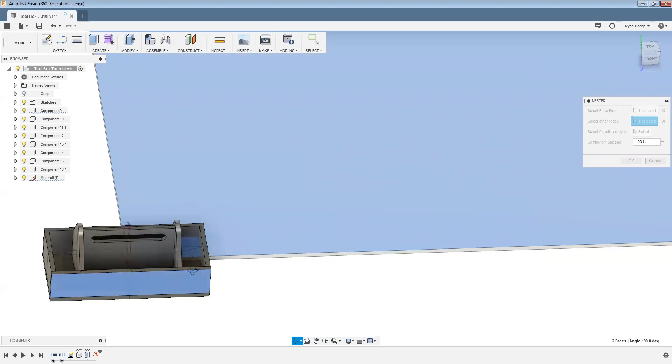Now the first component to input is the material to be cut, or the face of the material to be cut. And then we'll select the faces of the components to be nested. So I've noticed that it will nest the components in the order they're selected. And for what we're doing, a simple two-dimensional cut, there's no additional pockets or slots. So the face that we select is not very crucial.

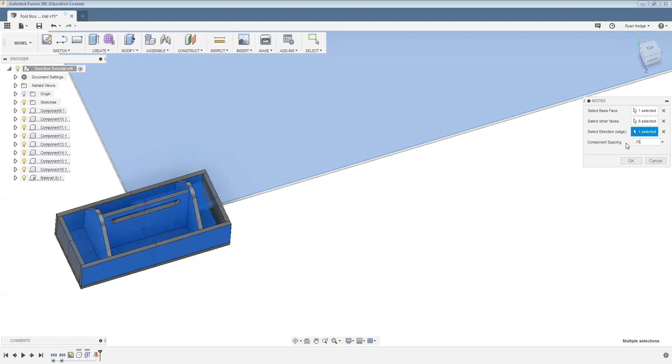Next, we need to input the direction of nest. So we'll take this long edge. And we'll be using a 1/4-inch router bit to cut out these parts. So I'll give it a spacing of 0.35, and that should be sufficient. So the Nester app flattens all of our components into the material. So if we look at it from the side, the components are embedded into the material.

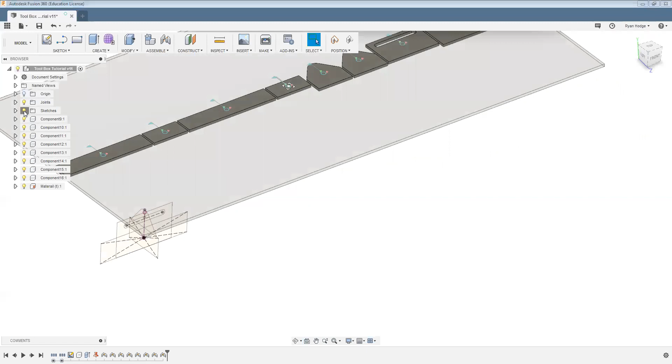Now we no longer need sketches, so we can turn that off. I notice a slight flaw with the Nester app. If I go and capture the position now, it brings everything to the center of the material. I can Control Z to bring that back. And I need to make a move function to capture all of these parts.

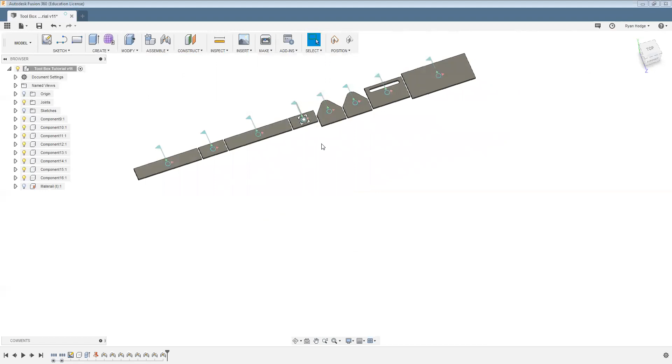So I'm going to use M on the keyboard. I'll select all the parts. I'm going to use a point-to-point move. I'm going to move it from this upper corner to the upper corner of the material.

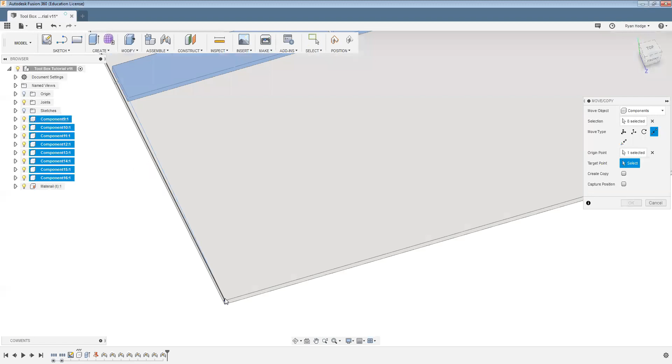Now I also need to move my components a little bit away from the edge. So I'll come back to the move type and select free move and drag it in this direction. And I'm going to come off the edge 1/4 of an inch. And I'll do the same for this next edge, 1/4 of an inch.

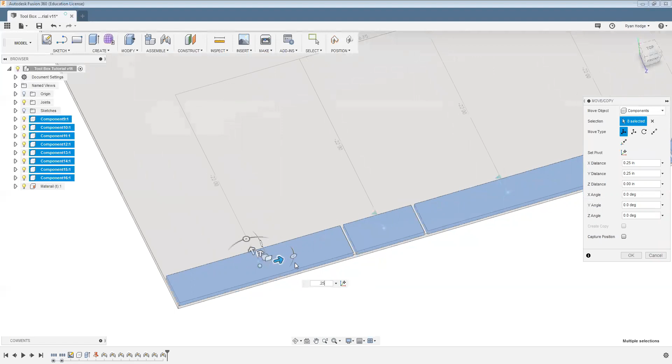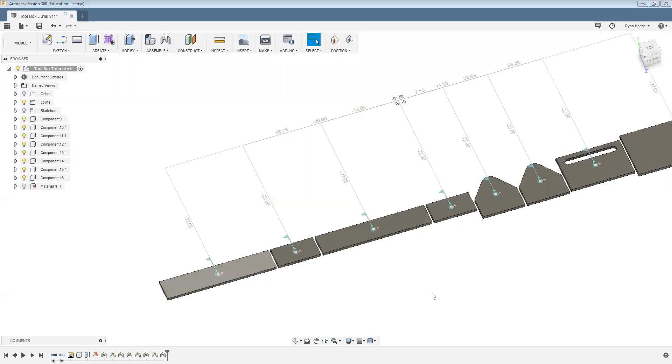Okay. So now I'm going to continue moving these parts to where I think they best fit in the scheme of this cut. So I'm going to try and contain everything within this section here. I no longer really need to see the material because I know the spacing I'm going to use. So I'll select M on the keyboard again for move. I'll use this point-to-point move again. So I'll move it from that corner to that corner.

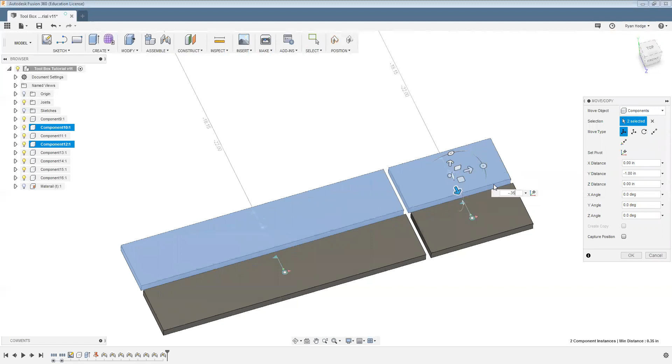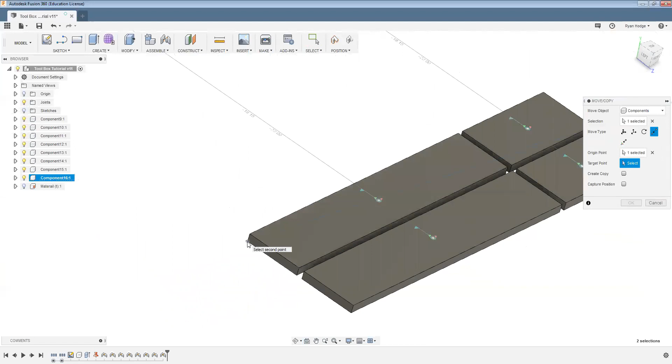I go back to the free move, and I want to move it away minus 0.35. And I'm just sort of moving it where I think the parts will fit the best. It is ideal to double check the material that you're going to be cutting to make sure that it's going to fit within this range that you're nesting the parts into.

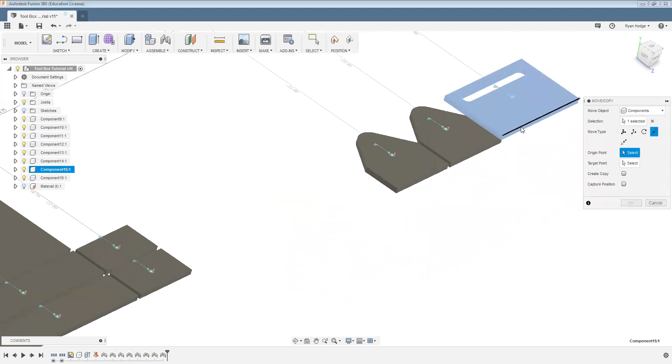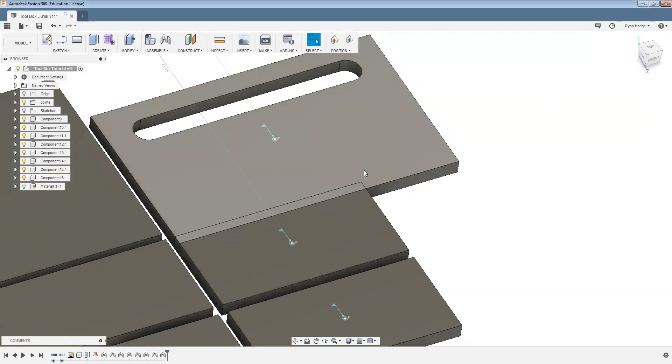Go ahead and move it point to point. And free move, keep the gap of minus 0.35. So that one, it moved in the wrong direction. I can Control Z, or I can just move it 0.7.

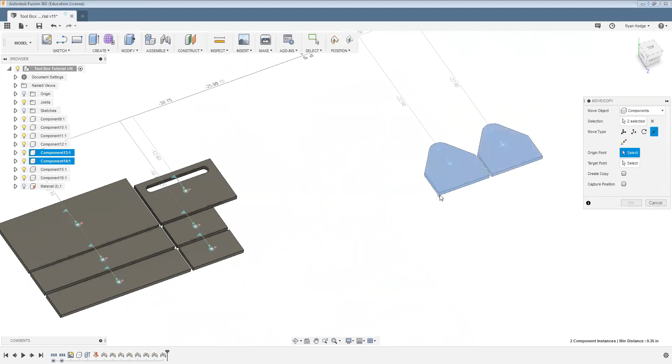And then lastly, I'll move these two into position. Point to point, free move, 0.35. The last thing we'll do is we'll capture this position. If we don't capture the position and we accidentally hit revert back, it will unnest everything.

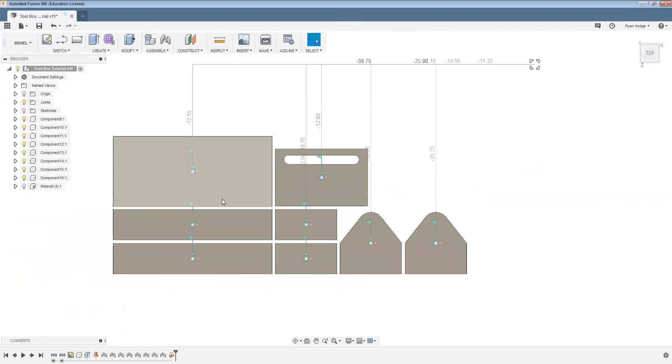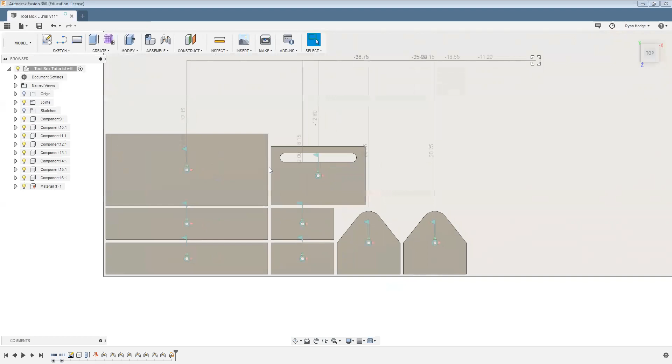And we can show the material. So we have a nice 1/4 inch gap around the material. It'll give us room to locate this on the spoil board on the CNC machine. And we have a nice spacing between parts that's not too far that we're wasting a bunch of material. It's not too close to where parts are on top of each other and the bit is cutting both parts. So this is a good point to save.

And we can save this as nested parts. The next video, we'll look at applying the toolpath.